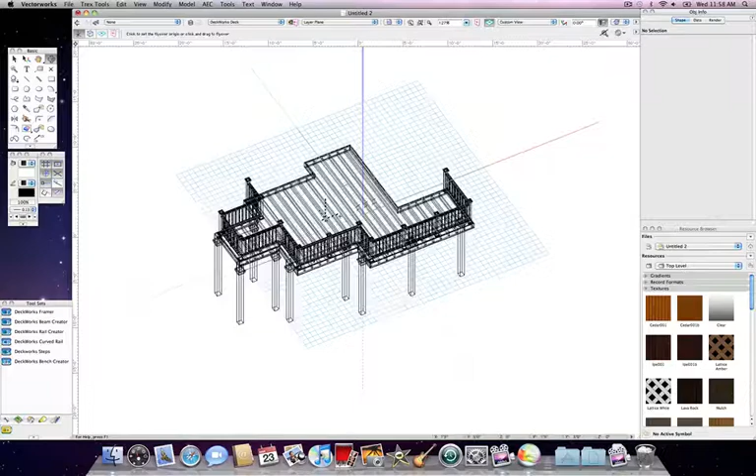If you find yourself having a hard time keeping everything oriented, you can go back to your top plan view. This is a little trick I like.

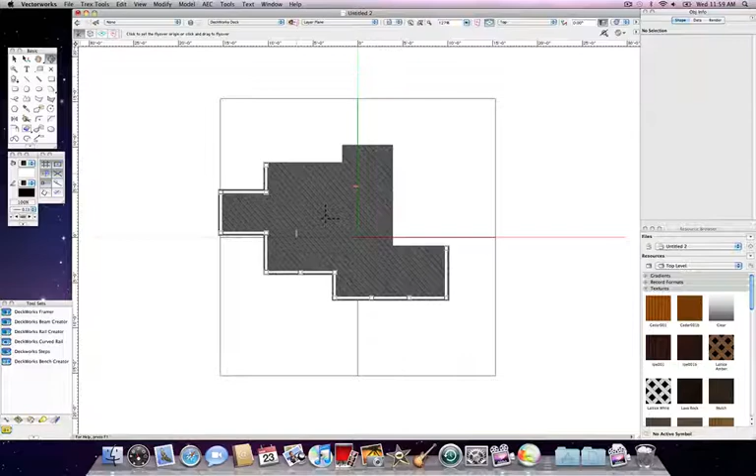We're going to change our drawing to OpenGL, so we'll be able to visually see a basic rendering of what it's going to look like. Now when you do this and you grab your flyover tool and repeat the same process, you'll notice that everything stays rendered with this tool. This makes it very easy to keep oriented into the right perspective.

So as I rotate this up into 3D, you'll see that it does create the 3D drawing, but it's very basic and it doesn't show a real perspective. Even though it looks cool, we can make it look better.

So the next step up from this category would be changing our rendering to fast RenderWorks, or even going all the way to final quality RenderWorks. Once I select final quality, you'll notice that it will re-render itself, and it'll look a lot more photorealistic.

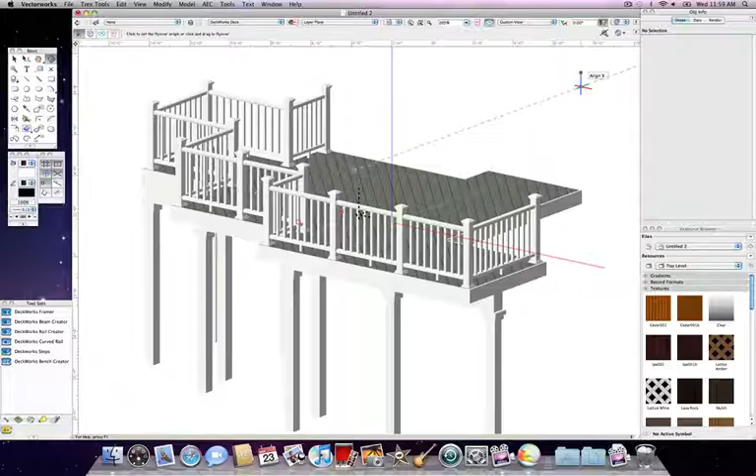But the whole point of this demonstration is to get it as photorealistic as possible. So we're going to switch back to our top view, and we're going to use some existing DeckWorks tools. I'm going to show you a mixture of things that I like to do. It's almost like having your own ingredients to cooking a certain type of meal.

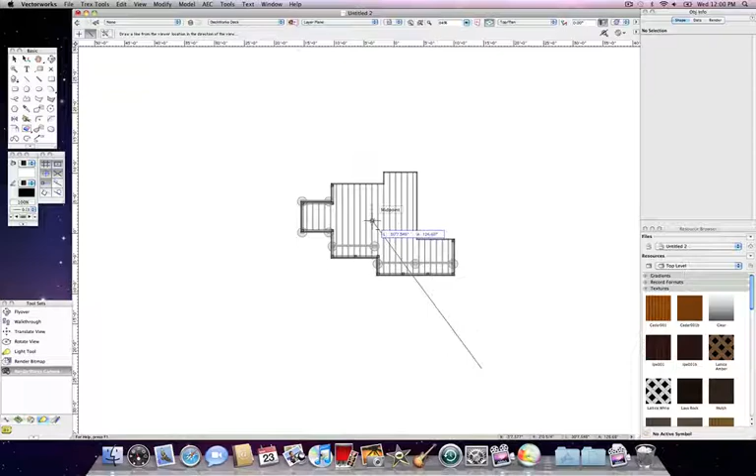So what I do is I select the light bulb located on the bottom left, the visualization tool, and inside of here we're going to grab the RenderWorks camera. Simply select your backyard by left clicking one time and then left click a second time in the center of the deck. This is going to create a perspective.

You'll see the line of sight and your visual path, which is located on these exterior two lines. Now if we look in our object info palette, we're going to see a camera height and a look height.

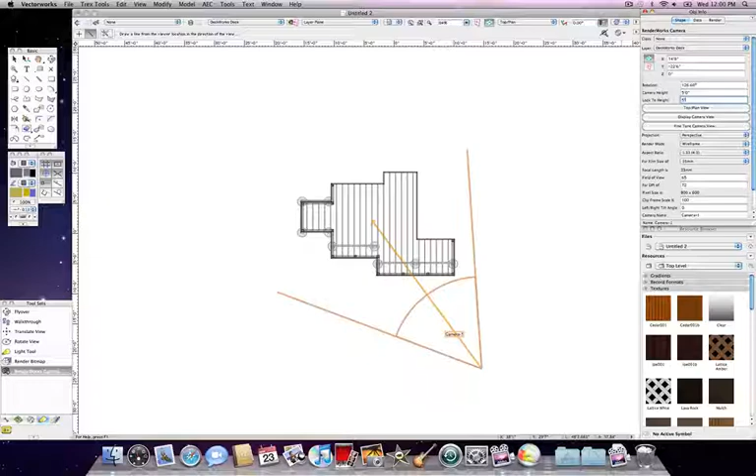For this example, we're going to change our look height to be the same as our camera height. So this is assuming that with a camera height of 5 foot, the camera is approximately 5 feet off the ground, or maybe even the individual taking the photograph is 5 feet. We're also going to type in 5 feet for the look height and hit display camera view. This is actually going to create that view for us.

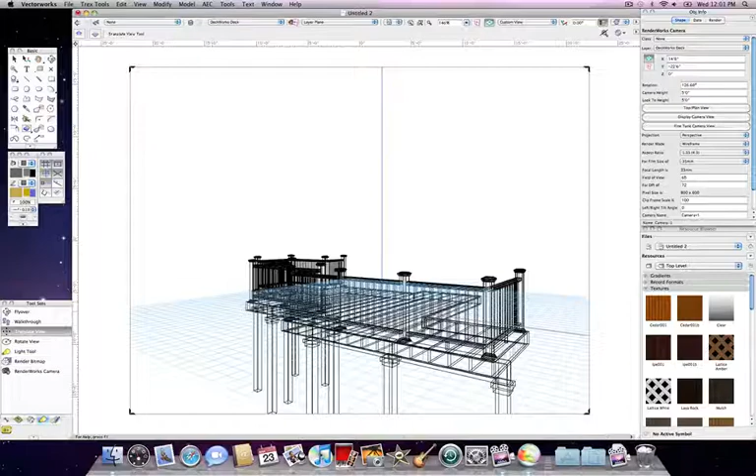If you hit one of these magnifying glasses up top, it'll maximize everything on the screen for you. I typically like to select the second option, fit to objects. Now from here you can use your other tool sets inside of the visualization palette. Translate view, you can left click on your screen and raise it to the appropriate height.

Now once again, once we have our view, we're going to go ahead and go to OpenGL, and you'll see that it has a nice, more realistic perspective view, but it's still not quite there.

So we'll go ahead and switch that to final quality, and you'll see that the drawing becomes a lot more crisp. If you scan back in this demonstration video, you'll see that the improvement from rotating it with just the flyover tool versus actually using the RenderWorks camera is a pretty dramatic difference.

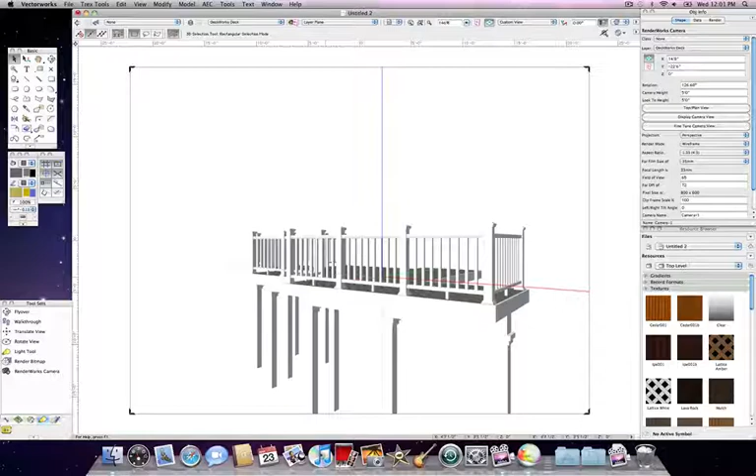But we're not done here. So what we want to do at this point, once we have the view that we like, so we can make changes quicker, we're going to switch this back to wireframe so we don't have to wait for it to re-render every change we make. We're going to go up into the View tab and into Lighting.

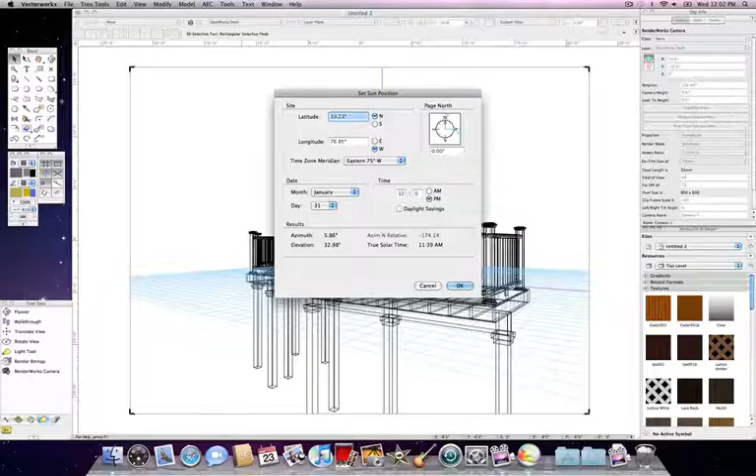Now the first thing we want to do is set the sun position. If you're just trying to make it look more realistic, you can simply press OK at this point. If you want to go into more detail, you can specify the latitude, longitude, month, day, and time, and this will show you where the sunlight will be portrayed on your drawing at that point. For this demonstration, I'm just going to press OK, and you'll see that it added in my light source there.

Once we've done this, we want to go back into our View tab, go to Lighting, Set Lighting Options.

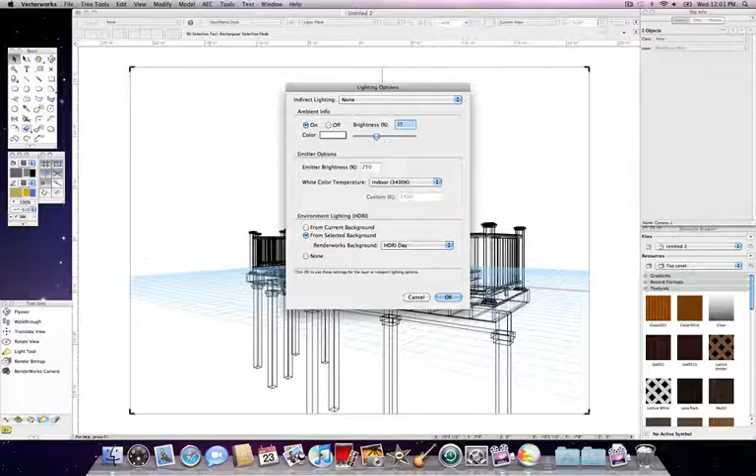So we want to look down here into environment lighting. We want to select the second option, which says from selected background, and change this to HDRI Day. Once we've done that, we'll press OK. The last step here is to render it once again in final quality, which is going to apply these lighting settings to our drawing.

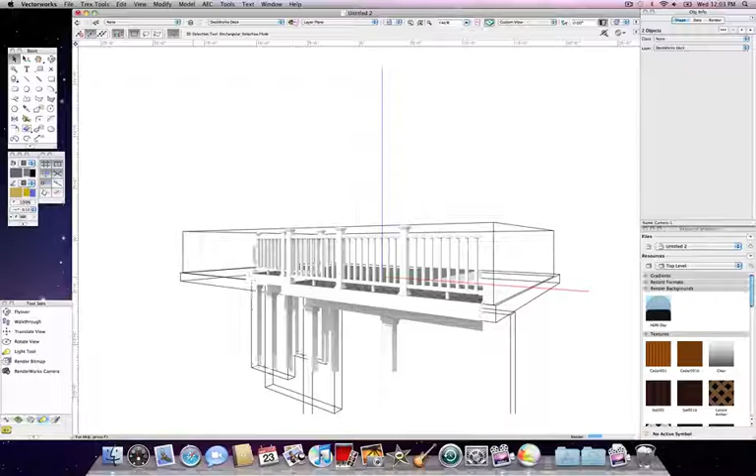This is pretty much going to be as photorealistic as you're going to get it. As this renders up, you'll notice the shadow from the pickets will be cast on the actual deck. Everything's going to look super photorealistic. You'll see the shadowing under the beam underneath. This is where you want to get your drawings to show a customer. This is what is going to make your customers say wow at the end of the day.

Once you've created this, you can simply go up into your File menu and export this as a PDF file, as well as an image file, which is a JPEG, bitmap, TIFF file, etc. You'll notice you'll still see the light object here as well as the UCS coordinate. Once you export that file, none of that will be visible. Depending on your light settings, you might have to change them to appear in wireframe only, and that will allow this little light fixture to go away.

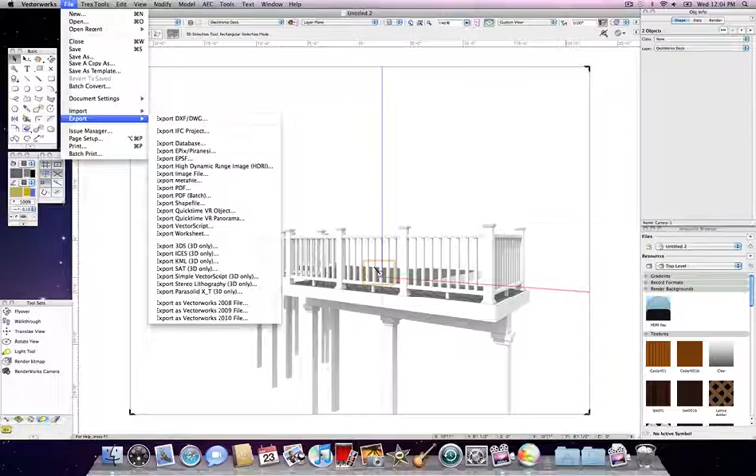Hopefully you can see the benefits of having RenderWorks on top of your VectorWorks package and utilizing the DeckWorks tool to create these awesome 2D and 3D deck designs that weren't very easy to create before this plugin.